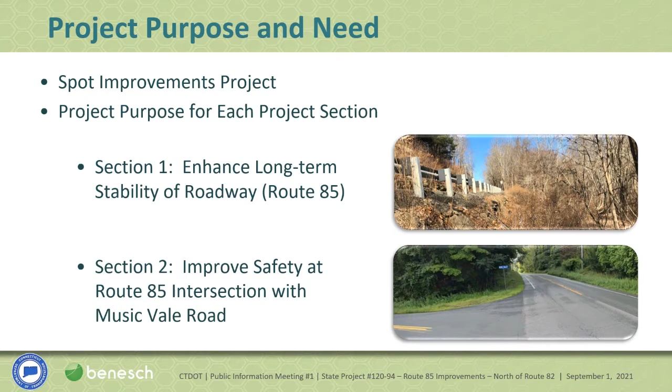Let's start first with Section 1. Section 1 has an approximate length of 1,100 linear feet in the vicinity of Sullivan Road. The primary deficiency of this segment is the existing masonry retaining wall located along the east edge of road, also adjacent to existing federal and state wetlands. Also of note within this segment is an existing rock outcropping located along the west edge of road.

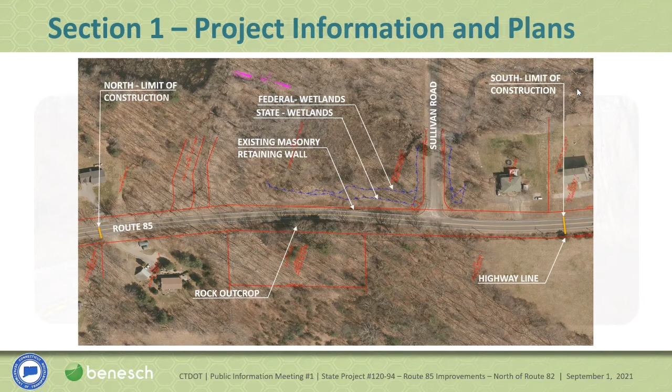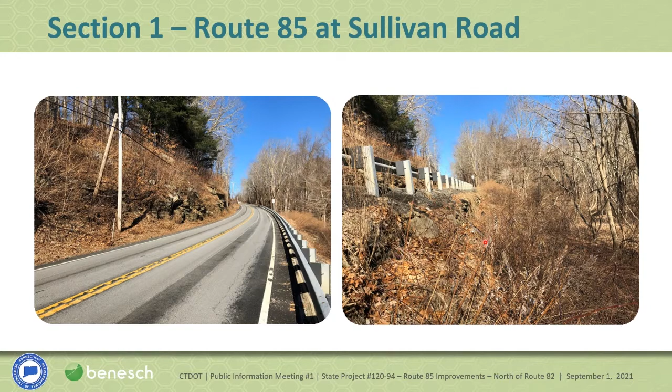The image on the left, looking north along Route 85, shows the rock outcropping just described. Also along this photo, you can note the narrow shoulders in this section. The image on the right shows the existing masonry retaining wall along the east edge of roadway, where some erosion has taken place and some settlement of the stone is noted.

Route 85 at Sullivan Road is classified as a rural major collector and is not included on the National Highway System. The average daily traffic, as measured in 2019, is 3,000 vehicles per day. The prevailing speeds along this section of the road are between 49 and 50 miles per hour, and the posted speed limit is 45 miles per hour.

A review of the crash history from January of 2017 to December of 2019 showed that 2 crashes had occurred, both involving collisions with fixed objects.

At this time, I'll turn it over to Laith Alatar, highway designer, to provide some detail on the work proposed for this section.

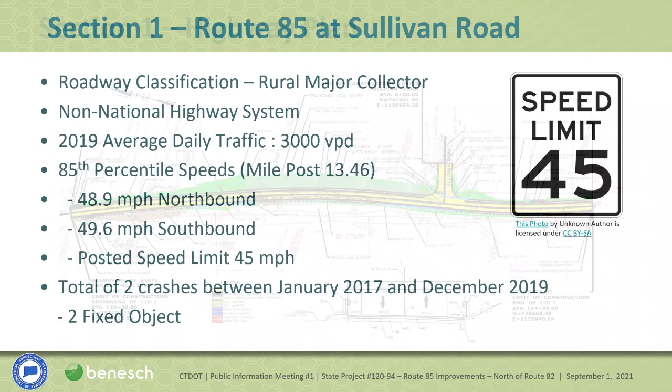For this slide, Section 1 Highway Plan, the proposed safety improvement includes establishing a roadway width of 32 feet consisting of 2 12-foot travel lanes and 4-foot shoulders.

There is a poor condition masonry retaining wall which will be replaced with a steeper slope reinforced embankment. The proposed work also includes installation of new guide rail along the east and west side of Route 85 to improve safety, and a new drainage system along the west side of Route 85.

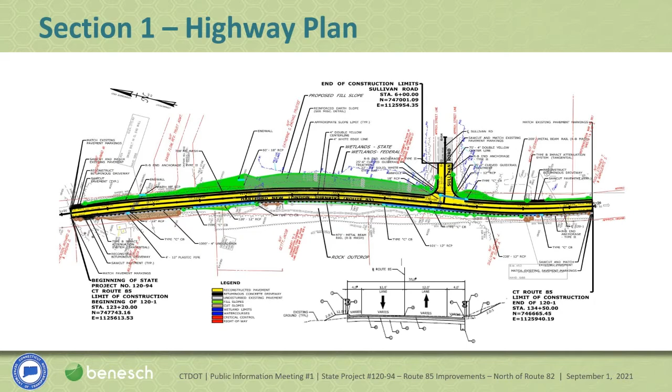For this slide, Section 1, Route 85 profile. For segment 120-1, the intent of the full depth reconstruction is to improve road safety and make it adequately meet the design standards.

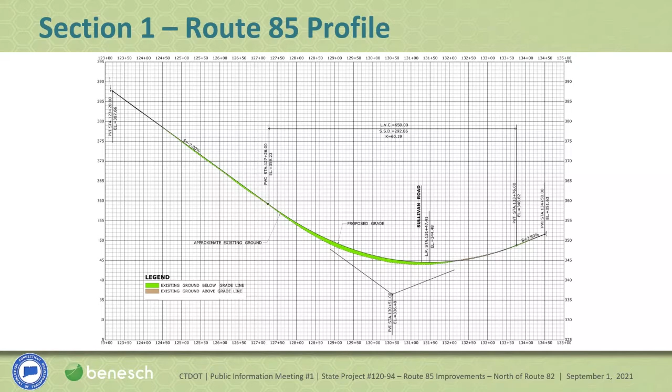For this slide, Section 1, critical section, as we mentioned before, segment 120-1, Route 85 will be constructed to a 32-foot wide roadway with 1 12-foot lane and a 4-foot shoulder in each direction. The use of reinforced steeper slope will reduce impacts to wetlands, which is located at the base of the existing embankment.

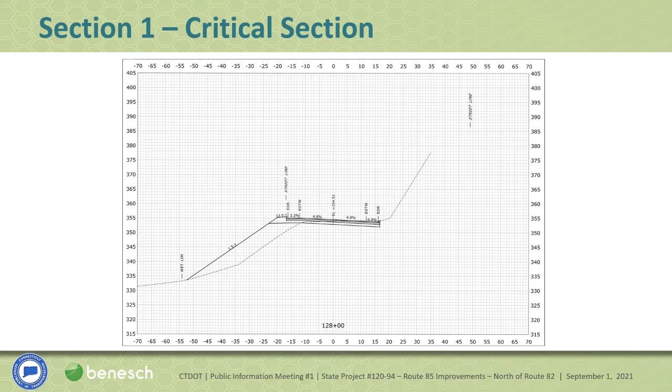Also, by utilizing the steeper slope, we are able to minimize potential impacts to wetlands and private property along the base of this slope.

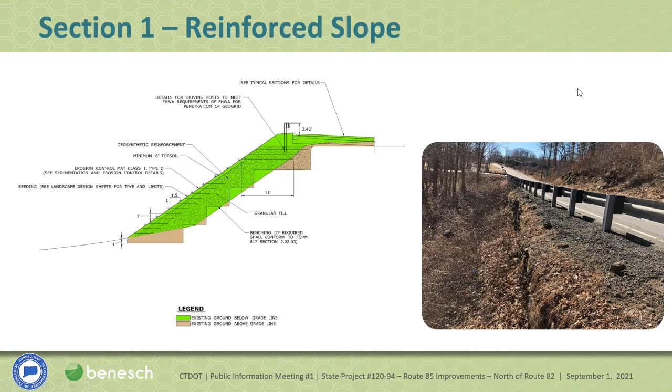Let's move on now to Section 2, Route 85 at Music Vale Road. As a reminder, this slide shows the relative location of segment 2, the section at Music Vale Road, with segment 1 at Sullivan Road, and with the intersection with Route 82.

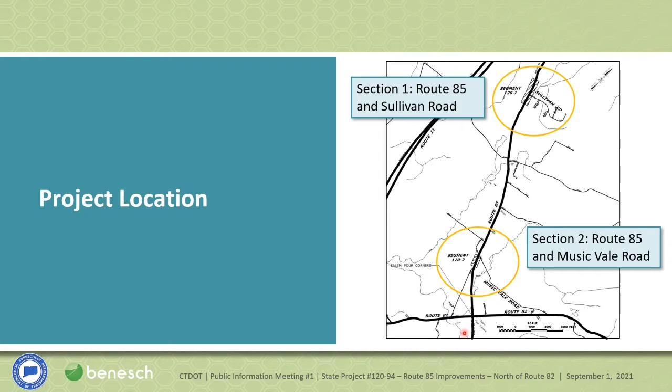The primary deficiency at this location is the limited sight line looking from Music Vale Road south along Route 85. As the picture on the left shows, there is an embankment on the east edge of road, as well as a hump in the vertical alignment of Route 85, which obscures the view south along Route 85.

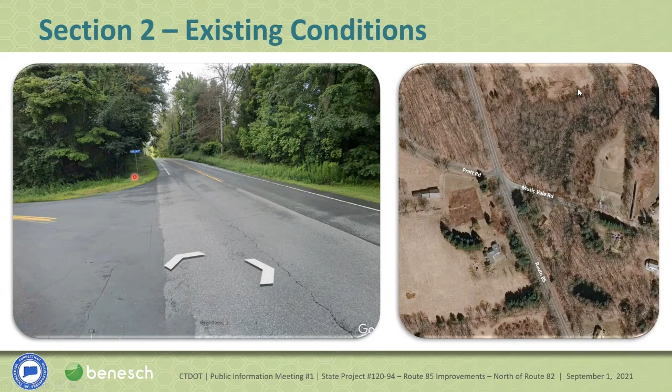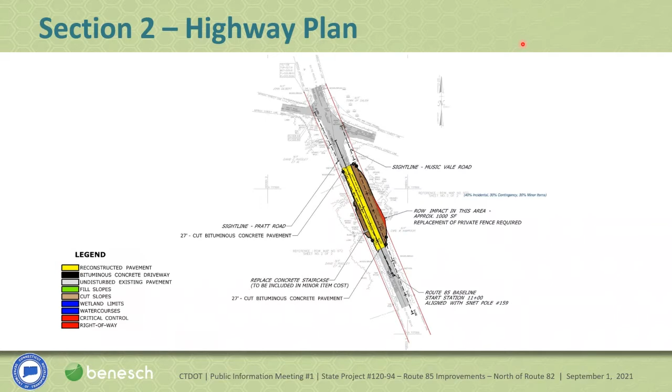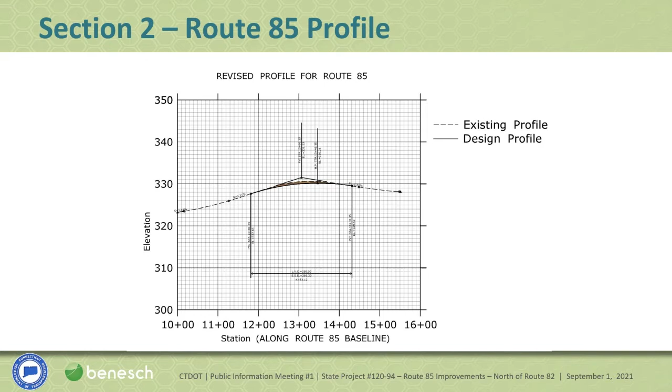The proposed plan for this location is to reconstruct a little over 200 linear feet of Route 85. This includes regrading of the adjacent embankments. The existing grade along Route 85 will be slightly lowered to improve those sight lines in this location.

This slide shows a typical cross-section at section 2. As the image shows, the existing grade along Route 85 is being lowered by several inches, and the embankment along the east edge of roadway is being reduced significantly, both in order to improve the sight lines.

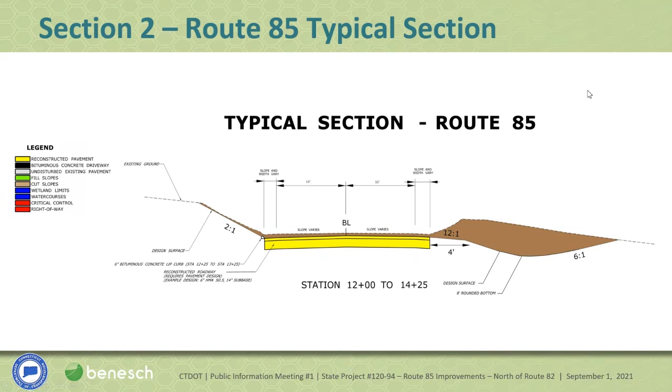Now that we've presented both sections, let's get into a discussion of anticipated project impacts, starting with wetland impacts. State Project 120-94 does include some anticipated wetland impacts only along Section 1.

As discussed earlier, our design considered the use of reinforced earth slopes as compared to typical sloping. This slide quantifies some of the benefits of using the steeper slopes.

Looking at state wetlands, the reinforced earth slope has an environmental impact of 745 square feet, whereas if we had used traditional sloping, this impact would be 2,925 square feet. Considering federal wetlands, the reinforced earth slope has 0 impact, whereas the normal slope would have had 750 square feet of impacts. As discussed, Section 2 has no wetland impacts anticipated.

The anticipated environmental permits for this project are a CT DEEP Inland Wetlands Permit and a U.S. Army Corps of Engineers General Permit.

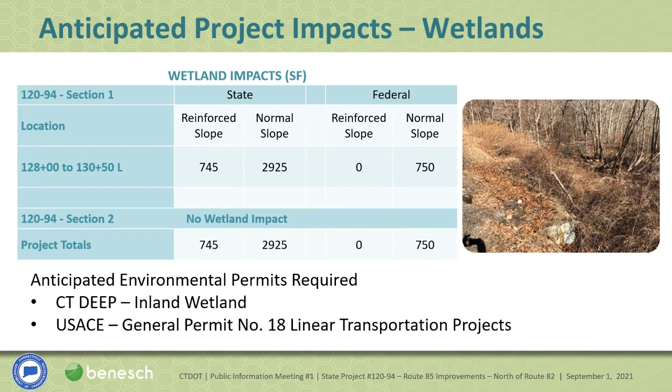As a part of preliminary design, archaeological assessment surveys were performed by our subconsultant AHS along both sections of this project. AHS found that both sections have low archaeological sensitivity.

That said, some recommendations were provided for this work. Along Section 1, a recommendation was made to restore any disturbed fieldstone walls located along this section using original stone. There was also an existing stone mile marker along the west edge of the roadway near Sullivan Road, which is directed to be carefully reset as needed if disturbed.

Along Section 2, a recommendation was made to protect foundation remains associated with the Music Vale School that are located outside of the anticipated project work limits.

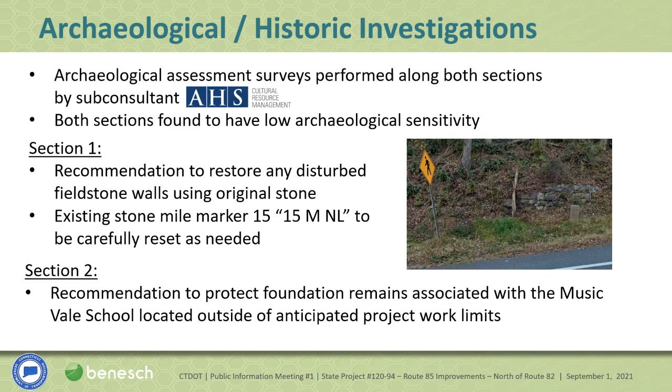This project also includes some anticipated rights-of-way impacts to adjacent properties. Along Segment 1, there are 2 properties with anticipated impacts: 580 Hartford Road and 566 Hartford Road. Along Segment 2, there's 1 property, 9 Music Vale Road, at which we anticipate potential property impacts.

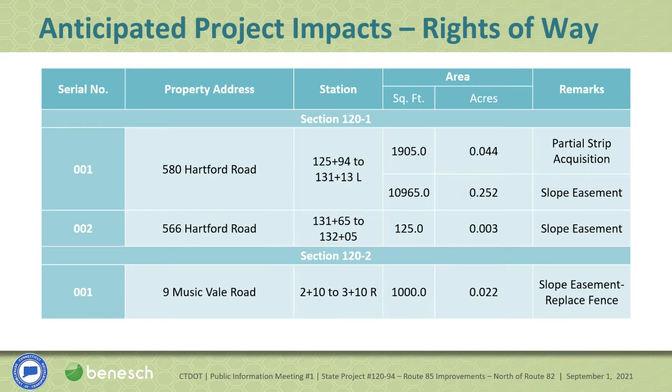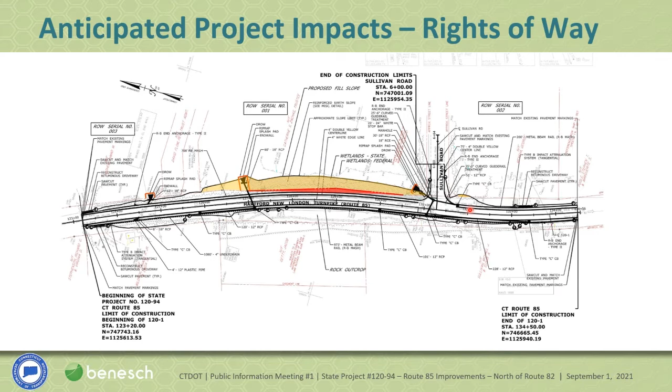At this time, I will turn it over to Dennis McDonald of the Connecticut DOT Rights-of-Way Unit for some additional discussion on the rights-of-way process.

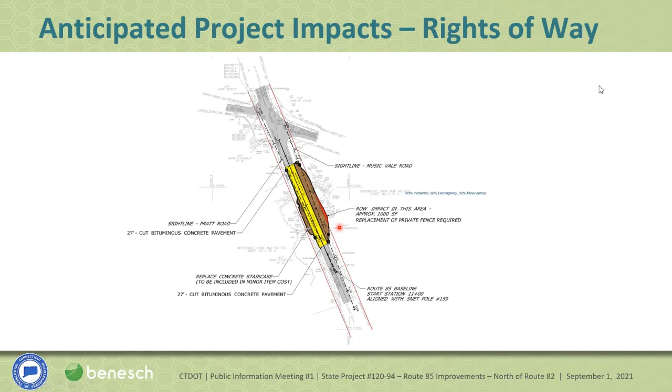Good evening, everyone. My name is Dennis McDonald, and I'm a representative from the Connecticut Department of Transportation, Division of Rights-of-Way. I'm just going to provide a brief overview of the right-of-way process.

So the function of the Division of Rights-of-Way is to acquire all property and property rights necessary for the project. This is done in accordance with Connecticut General Statute Section 13A73, 13A98E, and the Uniform Relocation Assistance and Real Property Acquisition Policies Act of 1970 as amended.

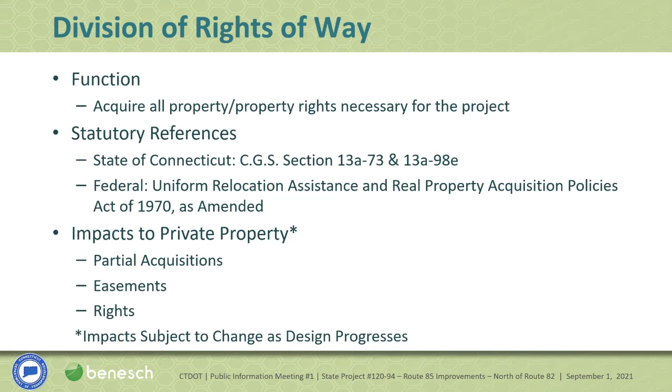Your typical right-of-way impacts include partial acquisitions, easements, and rights. Impacts are subject to change as the design progresses, but this gives a general idea of typical property impacts.

Once property impacts have been established, each impacted property owner will receive a letter of intent to acquire along with a property acquisition map. The letter essentially initiates the right-of-way process, and the map provides a detailed overview of the specific right-of-way impacts.

Soon after the letter is received, the evaluation process will take place, and once a value has been established, each impacted property owner will receive a written offer of compensation.

Property owners will be given time to consider the offer and negotiate should they wish. If an agreement is reached, an acceptance document will be signed, and a closing will take place at a later date. If an agreement is not reached for whatever reason, the state will utilize its power of eminent domain and acquire the property rights through the condemnation process.

Now, I understand this has a negative connotation, but many times this is done to keep a project on schedule. If the state elects to pursue eminent domain, the original offer is deposited in the court system, and property owners can continue negotiations or file a formal appeal for a reassessment of damages through the court system.

Please note all appeals must be filed within 6 months from the date on which the state files for eminent domain.

And that is all I have for tonight. Thank you for your time. Thank you, Dennis. This is Steve Dreschler again.

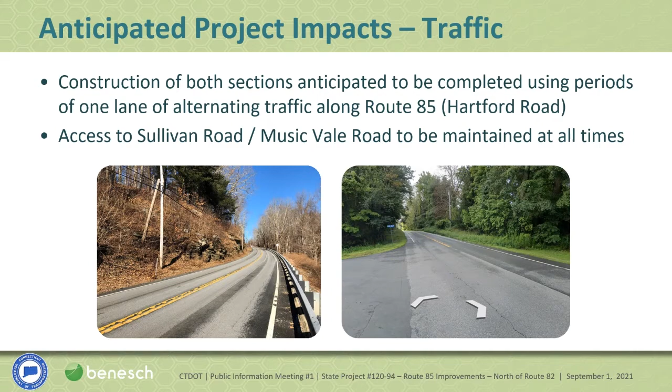And finally tonight, we'll close with a discussion of the project schedule and estimated cost. The current schedule calls for design completion and advertising in the fall of 2022.

Construction is anticipated to start in spring of 2023, and completion is anticipated in the fall of 2023.

The estimated project construction cost is $2 million. Funding for this project consists of 80% federal funds and 20% state funds.